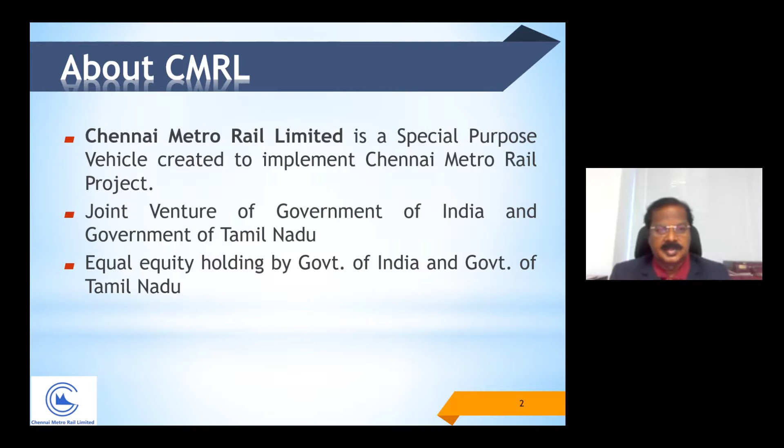Chennai Metro is a government company with 50-50 participation between Government of India and Government of Tamil Nadu. We have already completed Phase 1 involving 54.1 km with a total cost of 18,370 crore. This is under operation.

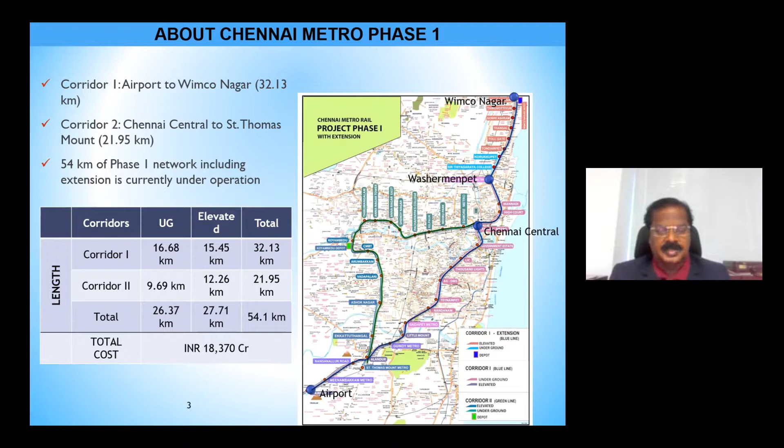And this is Phase 2 - the ambitious project of 118.9 km, which involves 42.6 km of underground and 76.3 km of elevated. We have to construct 128 stations within the short span of 5 years, 3 months. No such tight target has been taken up in any metro to date.

There are three corridors. One is the purple corridor called corridor 3. The other is the orange corridor called corridor 4 - orange color is not shown here. The other one is the red corridor, corridor 5.

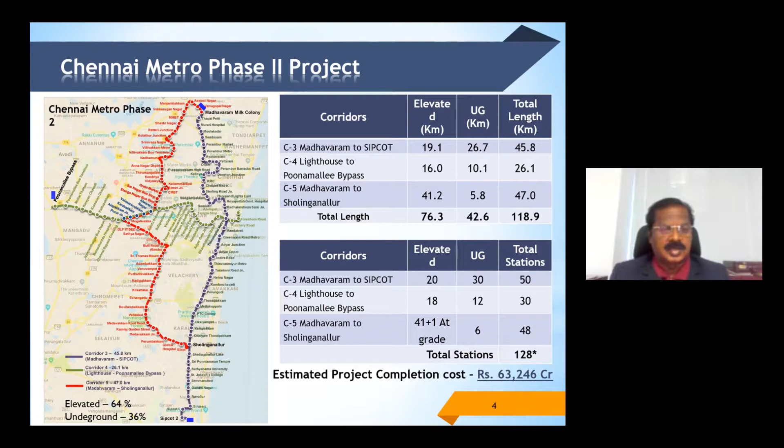These are the agencies funding our project. There are 4 agencies: JICA, ADB, AIIB, and NDB. They sponsor the entire project with different loan terms and conditions.

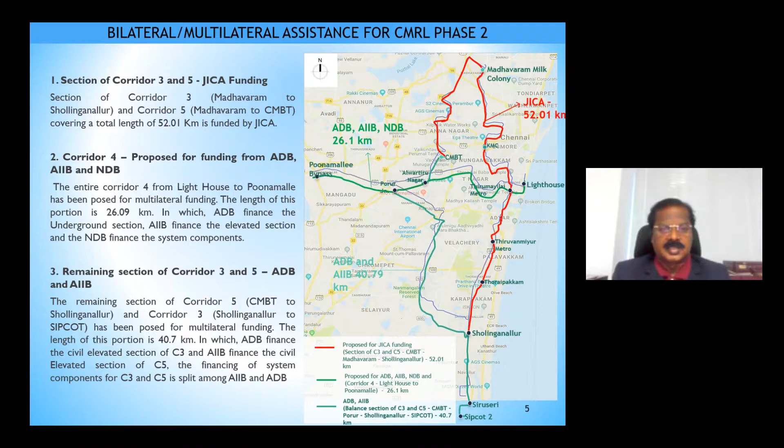And these are the major challenges which I am going to talk about. The total kilometer is 118 and the timeline is about 5 years, to be exact, 5 years 3 months. The number of civil and track contractors involved are 23, each varying from 1,000 to 2,000 crores. Number of system contracts like rolling stock and MEP is another 36. Totally 59 contracts are involved and being monitored through PMIS, Project Management Information System.

The construction for the civil works is to be commenced by October 21 - that is the start of the project. From there, in 5 years 3 months, we have to complete the project.

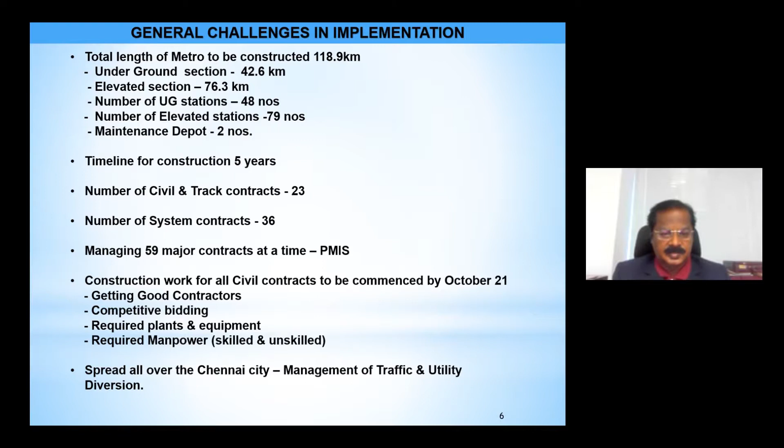The main challenges are listed below. The intersection between underground corridors, between stations, between tunnels - you can see C3, C4 and C1, C2, so many locations where corridors are intersecting. This is a major challenge, particularly underground.

And the crossing over of the river at 2 locations - one is elevated, another is underground. The intersection with the existing viaduct - we have already constructed 2 corridors as part of Phase 1. These 3 corridors are crossing the existing corridor at 3 locations.

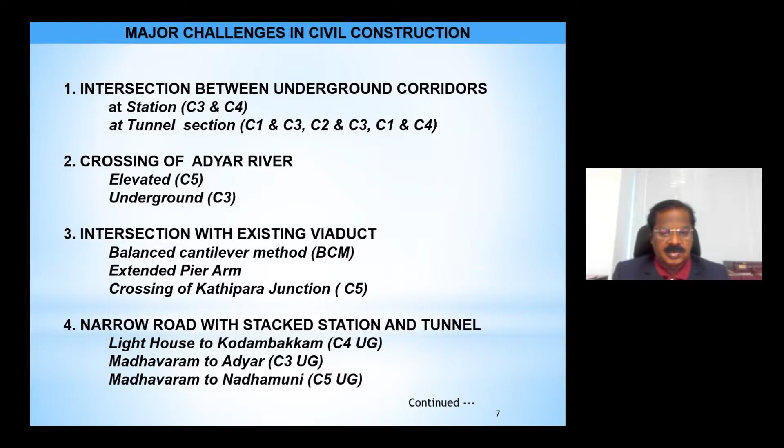The narrow width - we are adapting narrow width stations at narrow locations by stacked tunnel methods, which I will explain later. At certain locations, due to paucity of road width, one corridor is running above another corridor - that is, corridor 5 is running above corridor 4.

Another challenge is metro viaducts involved with flyovers and stations over existing flyovers. And there are obligatory spans which we cannot avoid - we have to necessarily adapt different methods of steel construction and balanced cantilever method of construction. Another common problem is we are crossing the MRTS lines and railway lines.

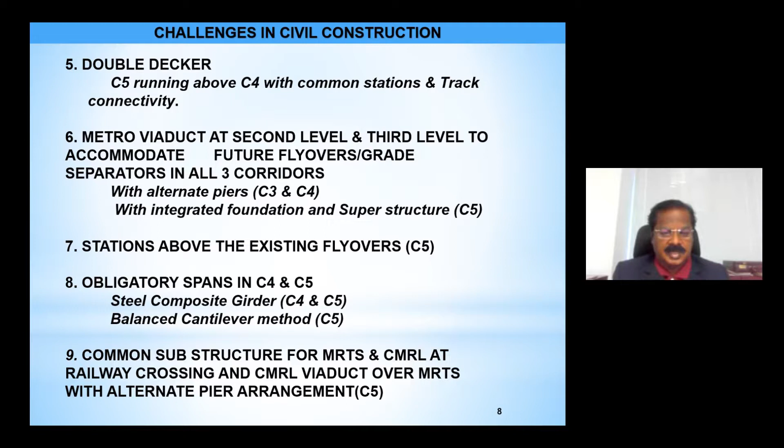This is one of the challenges. I will explain this in detail.

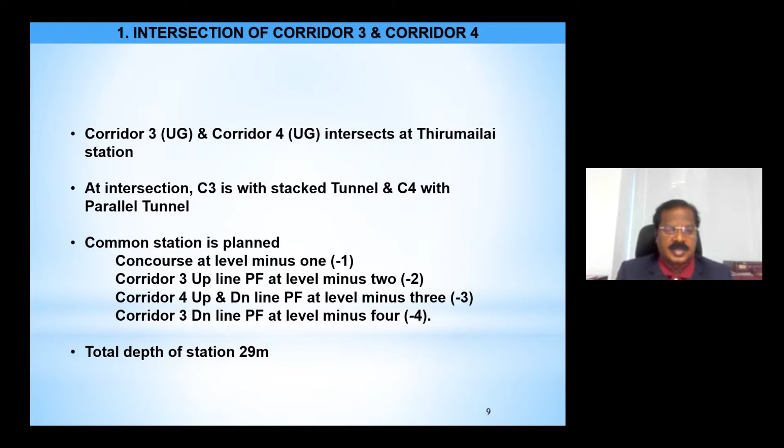This is actually where corridor 3 and corridor 4 intersect at Thirumailai station, where due to space constraints, this corridor is an underground station. Corridor 3 is stacked: one tunnel is above corridor 4, one tunnel is below corridor 4. You can see the drawings here.

You can see the train, two trains on the right side. These two trains are two tunnels, and these two tunnels are corridor 3, and corridor 4 is going in the middle. So this is the great challenge. Corridor 4 goes in the middle with two parallel tunnels, and one of corridor 3's tunnels is above corridor 4, one is below corridor 4. You can think about how difficult it is to construct a tunnel in this type of circumstance. This type of construction has nowhere been undertaken in India, at least. I do not know about abroad, but in India such situations have so far not been encountered.

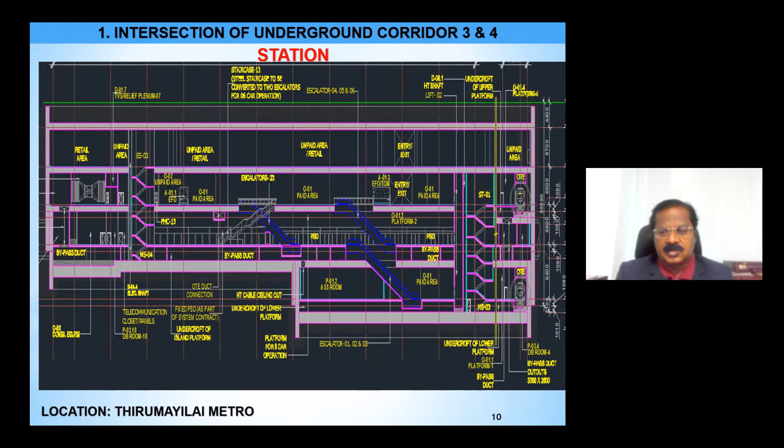This is the intersection of tunnels at various locations. At many locations we cross one tunnel below another tunnel, and all the tunnels we are going to construct are crossing below the existing tunnel, because we are not able to cross above due to vertical clearance. All the tunnels we construct cross the existing corridor below it. So that is a big challenge, because the existing tunnel above should not cave in or settle.

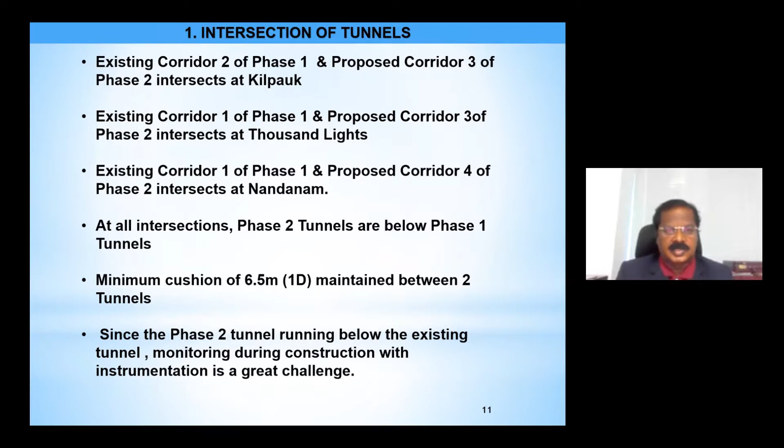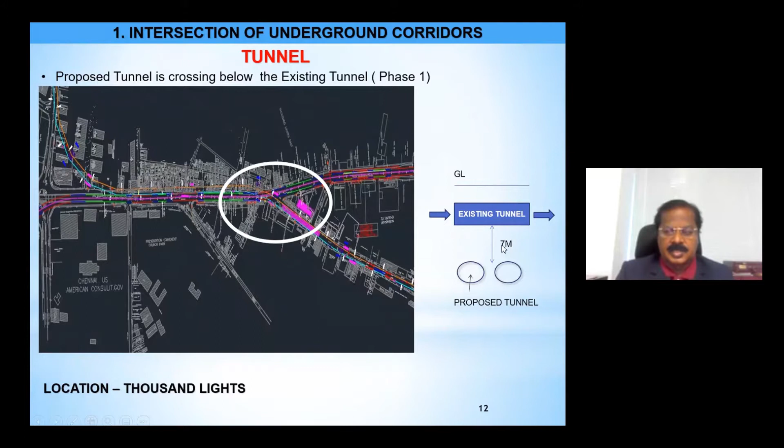This is the major challenge, and at many locations we face this situation. For example, you can see this existing tunnel, the green one and the blue one, and our tunnel at the bottom is crossing at many locations. So while boring the bottom tunnel, the top one should not sink or settle. We have to monitor this very carefully with instrumentation, so that while trains are running, the parameters stay within limits.

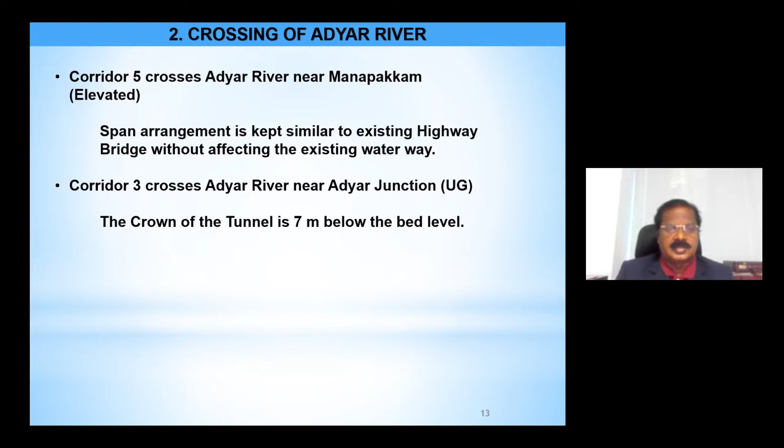Another location, our alignment crosses the Adyar River at two places. One is underground, another is elevated. This is the elevated location, this is the underground location. You can see the existing bridge and the Adyar River direction here, though it is not shown in color. Two tunnels go below the river.

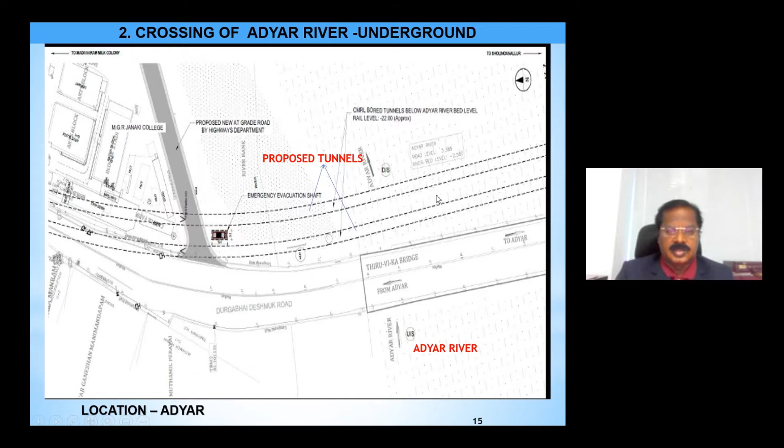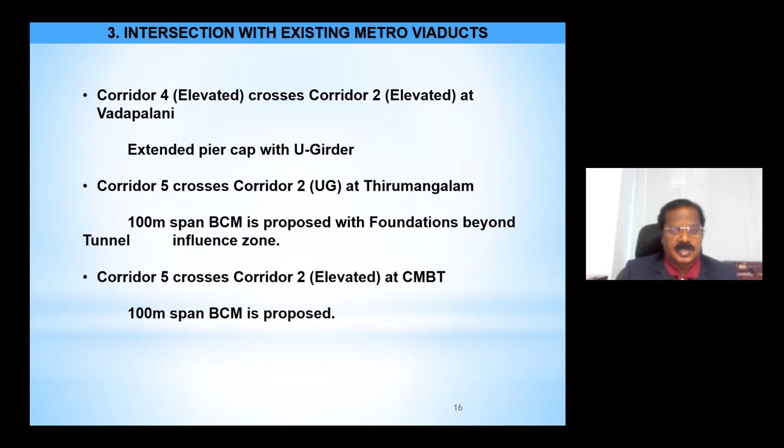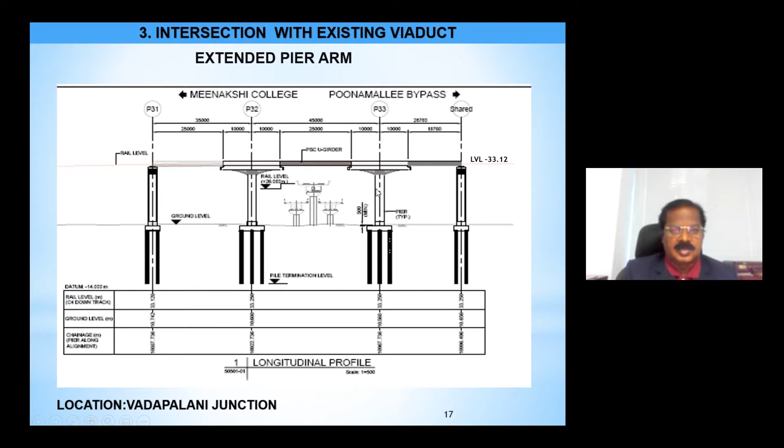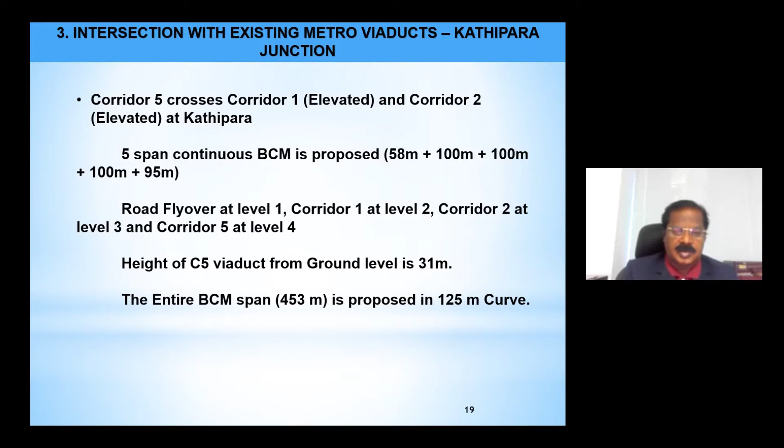There is an existing corridor at level 2, and another existing corridor at level 3, and corridor 2 at level 3, and our corridor 5 goes at level 4. So there are 4 levels virtually, and in the plan view it looks so complicated. You can see the plan view.

The clover leaf flyover is the Kathipara flyover, and there are 2 corridors and a flyover. Over that, our 4th corridor is going, and it involves 4 balanced cantilevers. Out of those, 3 are of 100 meters with 125 meter radius, and one is of 95 meters. So this is the most challenging location.

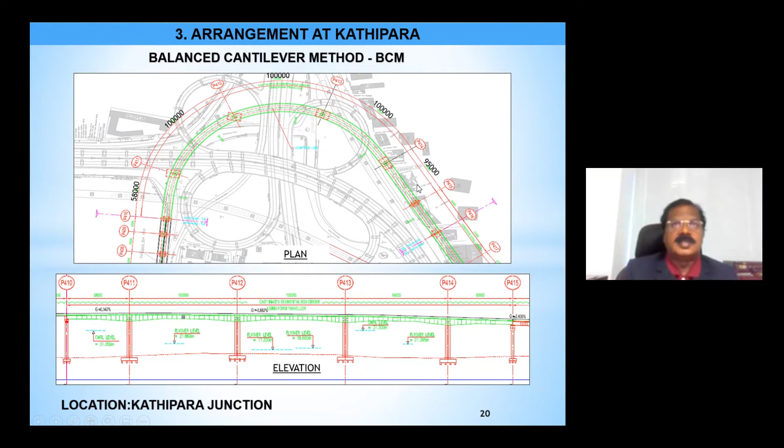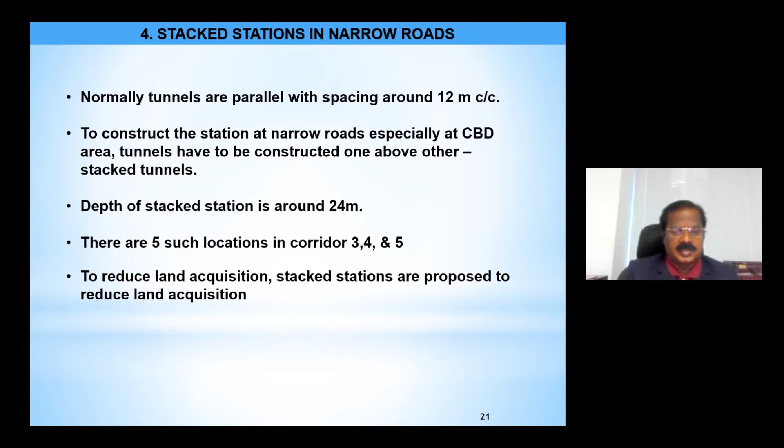There are 5 such locations in this project, phase 2. You can see the tunnel one above the other, and you can see the station is so narrow with the concourse. The concourse is in the middle, and the tunnels are above and below.

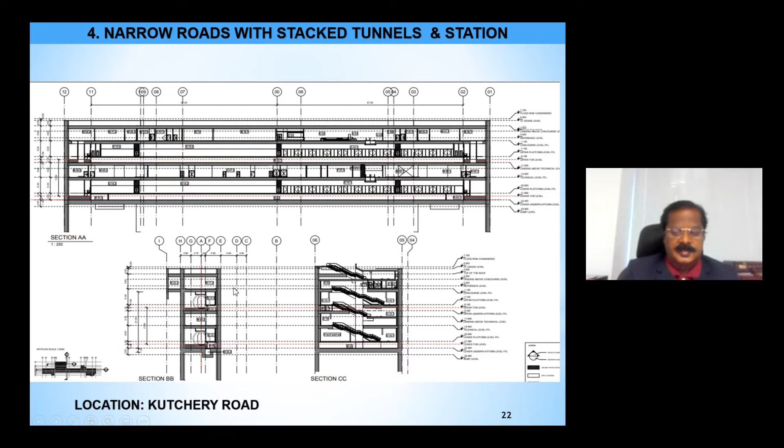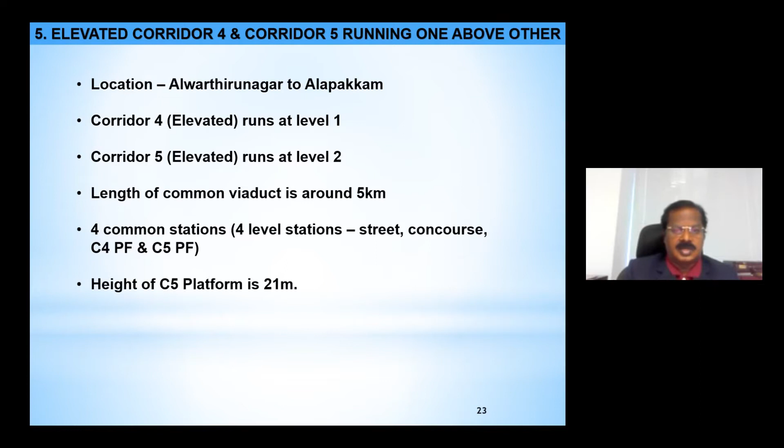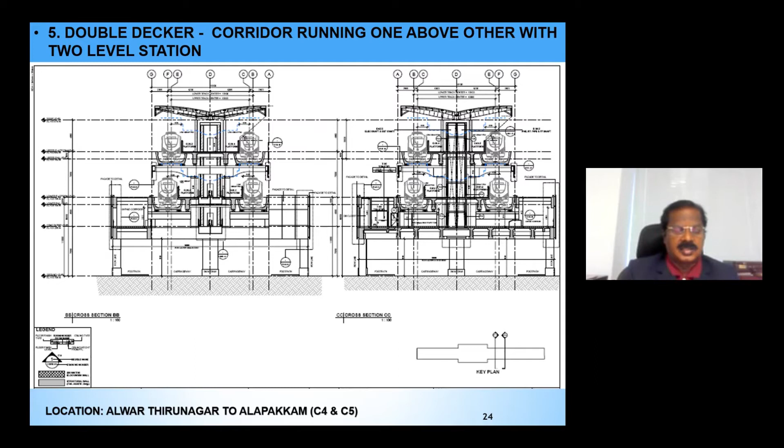Elevated corridor 4 and corridor 5 running one above another, like an underground stacked tunnel. In case of elevated also, there is a problem of spacing, so we are running one corridor above the other. You can see here, corridor 5 is at the top, corridor 4 is at the bottom. This is all due to narrow road width. The way we have done the stacked tunnel arrangement for underground, in the case of elevated we go one above another. This is a great challenge in construction - the method of construction, launching, using cranes, and the space involved are a big challenge.

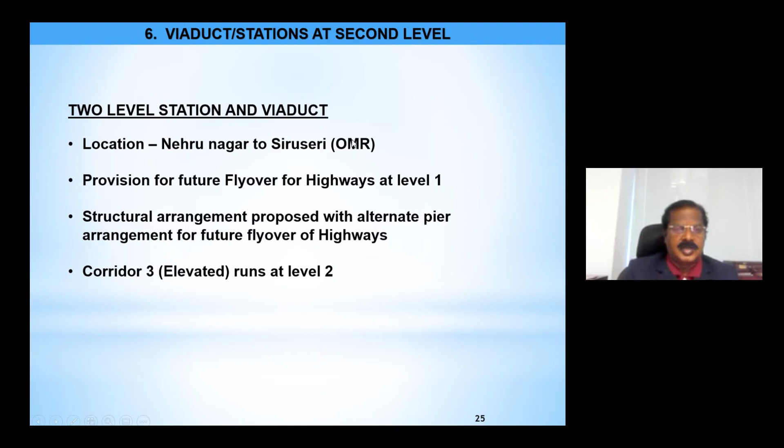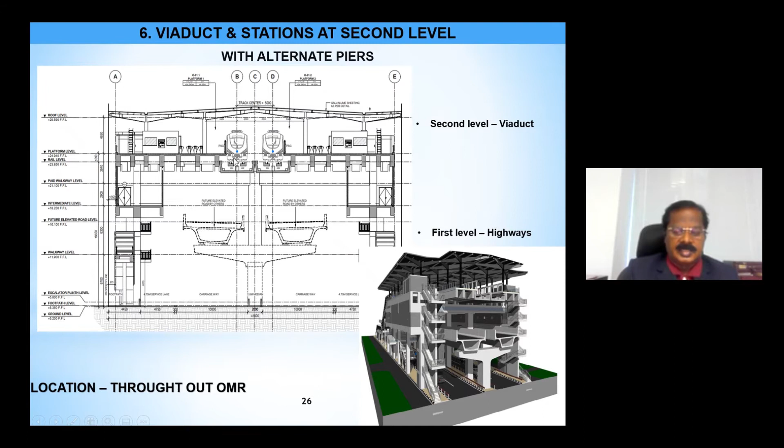And the 2-level station and viaduct - we are constructing a long elevated stretch in Old Mahabalipuram Road. Those familiar with Chennai know this is the major IT corridor stretch. Here we construct above and below - there are 2 levels of highway construction. One level is highway, and on top we are constructing a metro. In other circumstances, 2 levels of highway, and above that we are constructing. Nowhere is it being done like this in India. We are constructing at the top, and there are 2 levels below the metro which take care of highway requirements.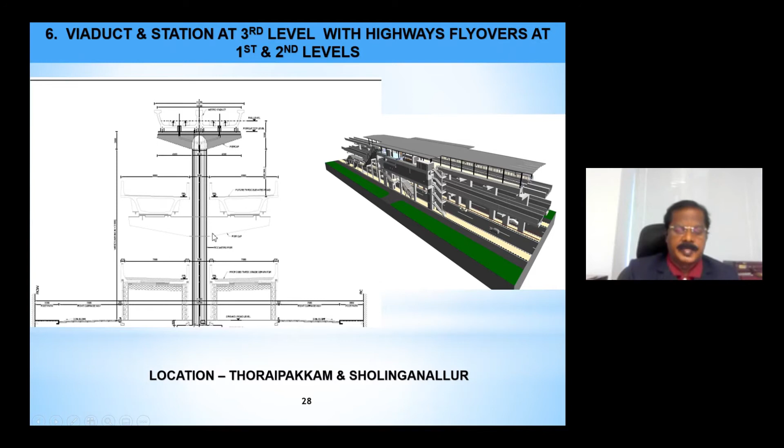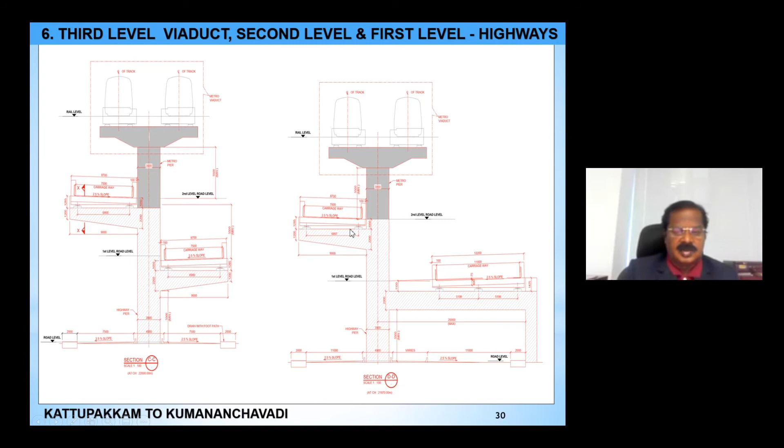And future flyovers also, you can see at 2 locations - I will show the cross section. Top is the Chennai Metro phase 2. In future, they are going to construct 2 flyovers in a staggered way, at 2 different levels - right side one, left side one. We are encountering this and giving future provisions for it now itself. So this is another challenging location.

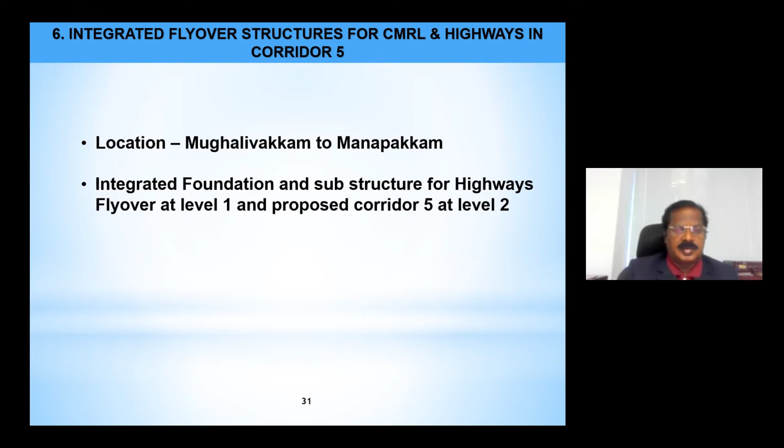One more location is near Chennai Trade Center, between Mughalivakkam and Manapakkam. Here again, we are integrating with a 2-lane highway on either side, and above that we are constructing metro. This is all at tender stage, shortly we are going to award - some places we awarded already, so work has started. One single pier, 2-lane highway on either side, and also 2 viaduct structures are going to be constructed. This is a great challenge given the traffic conditions.

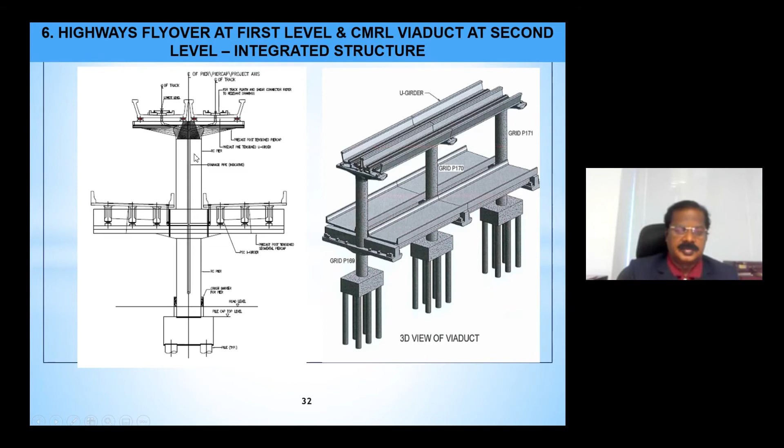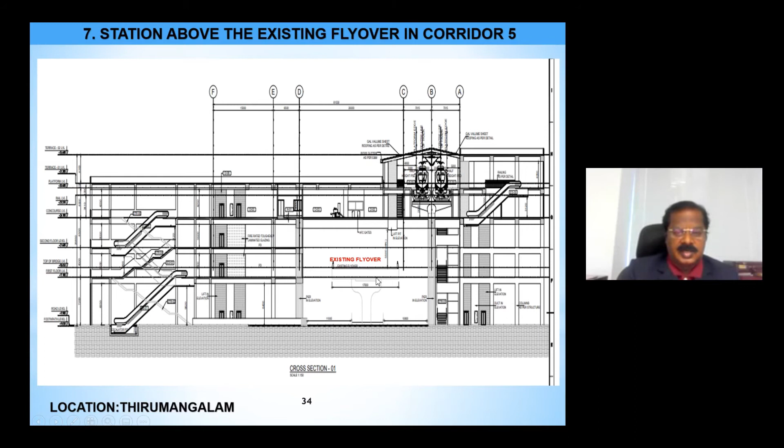And another location is over the existing flyover itself, we are constructing a station. This is near Thirumangalam. You can see the station itself is coming over the existing flyover because our site conditions are like that. You can see the middle existing flyover - enveloping the existing flyover, we are constructing a station. You can expect how challenging it will be, constructing a station in and around the flyover when traffic is running.

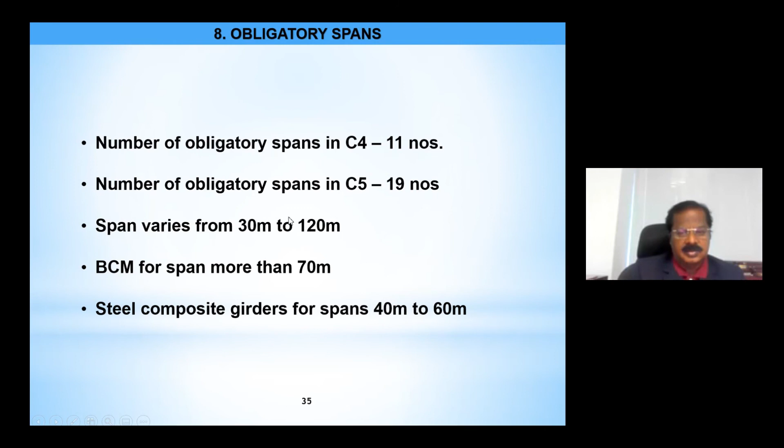In the entire project, there are 30 obligatory spans in corridor 4 and 5. These obligatory spans vary from 30 meters to 120 meters, which we cannot change. So we are adopting different methodologies of construction and construction material. For spans more than 70 meters, we are using the balanced construction method, called balanced cantilever method - it actually balances the weight on either side. That is BCM, for spans more than 30 to 70 meters. For spans between 40 meters to 60 meters, steel composite girders are being used. Such a large scale of obligatory spans has not been met in recent projects - I was in charge in phase 1 also, but this is a huge number in a particular project.

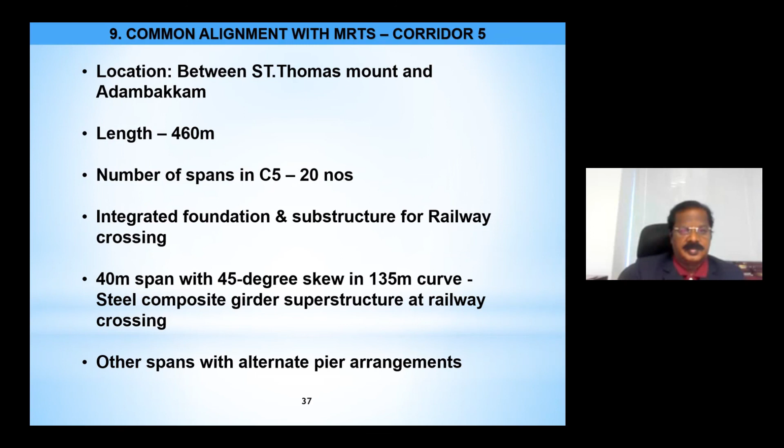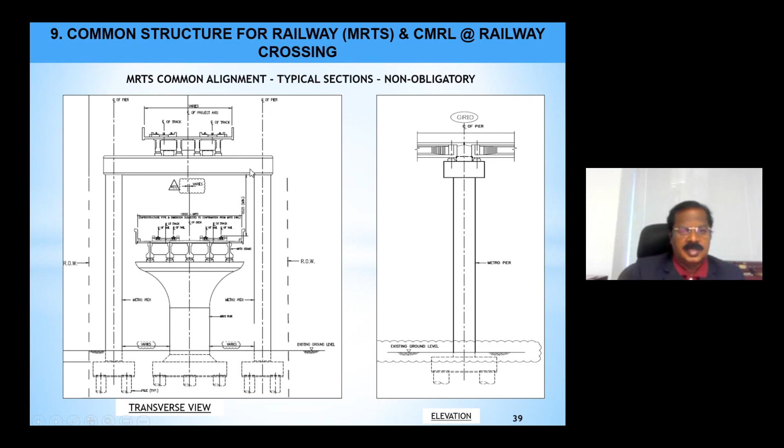Another major location is where we are constructing a common alignment with Indian Railways broad gauge, between St. Thomas Mount and Adambakkam. You can see the cross section here - this is the MRTS line of Indian Railways, a suburban line, elevated. Enveloping and enclosing that, we are constructing above it because of road width and space problems. So you can see how challenging it will be when trains are running and we are constructing above that. This is another major challenging location in our project.

With this, I will come to the conclusion. Thank you.